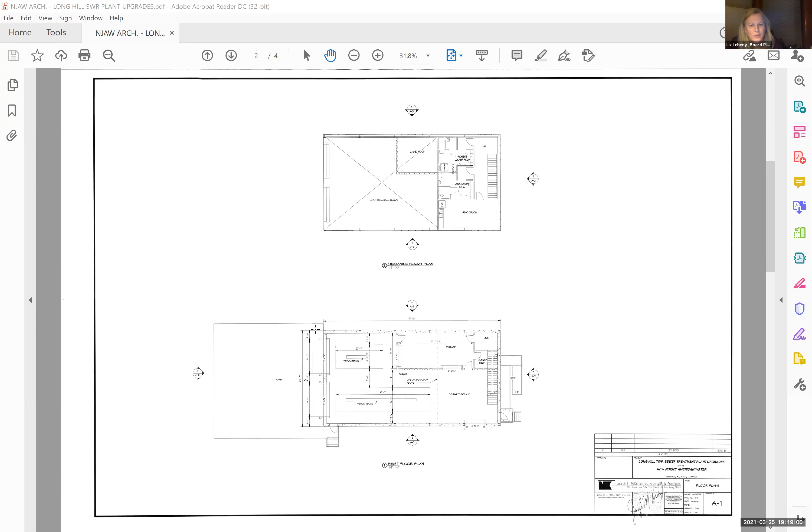Okay, can you just go to the elevations? I just want to, if you can explain it, looking at the elevation. So, okay, that's a good one, on the top one. So it's coming out there, and that's really sort of more on the south side of the building? That is correct, it's visible not on both - south side, I'm sorry, I didn't mean that, I meant the north side. Okay, okay, all right, thank you.

I am confused by the ground level of those big doors. There is a 5-foot flat spot right in front of the doors, and the rest is a ramp that will get us to the existing grade. Okay, thank you. That's probably shown on the site plan. We'll get to that.

Anything else, Liz? No, that's it, thank you. Any member of the board with questions?

You talked about the existing building. Are you talking about the building that includes the foreman's office, the generator, and the lab? Yes, sir. And you're telling me that building is now emptied in favor of the trailer? No, there are still some people in there. The lab is in there, and there's not a full-time employee in that lab, but it is occasionally manned to provide tests for the facility.

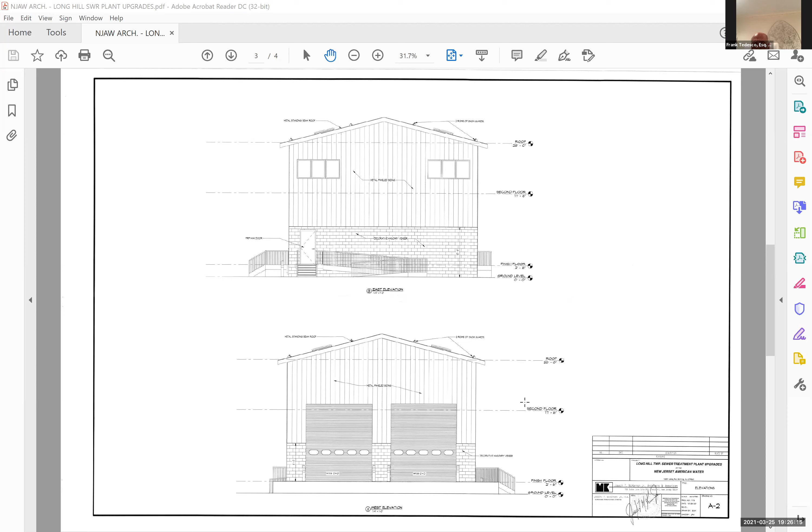Okay, Mr. Stires, please raise your right hand. Do you swear that the testimony you're about to give with regard to this application will be the truth, so help you God? I do. Thank you. Please state your name for the record and spell your last name. Craig Stires, S-T-I-R-E-S. Thank you.

And you are testifying in what capacity? I'm a professional engineer in the state of New Jersey, and I oversaw the preparation of the site plan for the location of the new garage.

Have you ever testified in Long Hill? Yes, I have. Oh, good. I have testified before this board twice for a couple minor subdivisions, one a couple years ago and one about 6 or 7 years ago. And your firm is located? Stires Associates, and we are at 43 West High Street in Somerville. Thank you.

Any member of the board want to hear any more about his qualifications? All right. You're on.

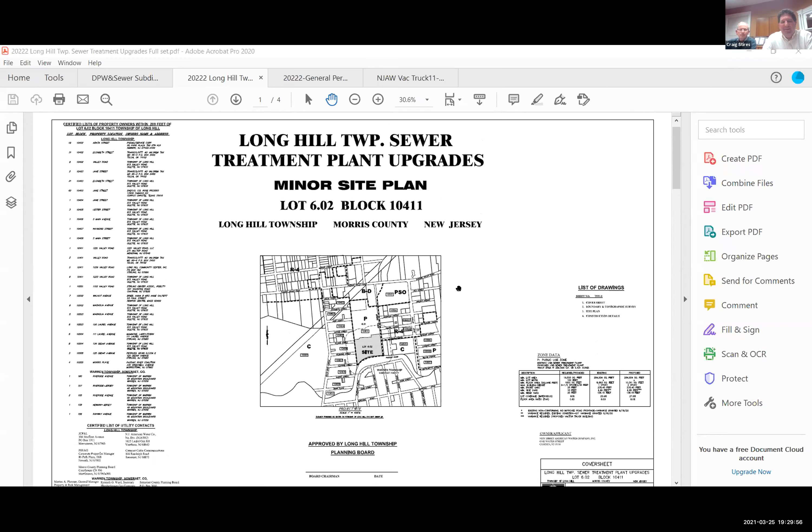All right, hopefully what you see here is the cover sheet of our plans. I'll scroll down. So this is the existing conditions. Now I'll get started, now that we've got it cleared up.

The existing site is known as block 10411, lot 6.02. While the address is technically 1227 Valley Road, it's actually located at the southern end of Warren Avenue. Warren Avenue intersects Valley Road right at Jaeger Lumber, and Warren Avenue goes down to what was formerly the plant itself, as well as the Long Hill Municipal Yard.

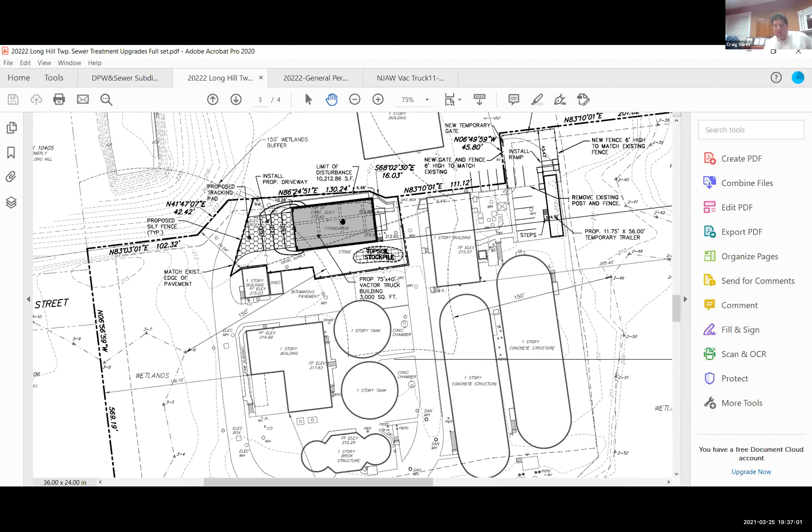The entire site is in the flood hazard area, so if we were to move this building to an open area, we would have to create some other compensation for the displacement of the flood hazard area. So with the existing foundation, utilizing the existing foundation, we're permitted to increase the size by 750 square feet under the general permit. That's the reason for the location of the building, essentially trying to use the existing foundation which was currently in that location. So technically speaking, that 4.48 feet off the sideline is to the existing foundation.

Understood, thank you. Now, the permit, you mentioned the 750, that's a permit by certification, and you've already received that? Yes. Okay, great, go ahead. Tell me about your permit by certification. If the application's approved, we will submit that as part of the documents, and if there's any changes to the plans, just so you have it on record.

Very good, thank you. A couple of questions about the utilities that I raised with the architect. Let's start with the diesel supply line that's indicated as existing between the two buildings. It traverses right under the proposed building. Is that diesel supply line located accurately, and if it is, how do you plan on working around that?

What we've done is utilize some older plans to begin to show the utilities. Subsequent to the plans being prepared and submitted to the township for this meeting, American Water has had the geotech go out, not only for bearing capacity for the building, but at the same time to investigate the specific locations of the utilities in and around the proposed footing or foundations. So we do have much better locations, which we will update the plans to show if the application is approved. It's my understanding that diesel line is no longer active, so again we worked our way from older plans as well as our field survey to get these as accurately as we could.

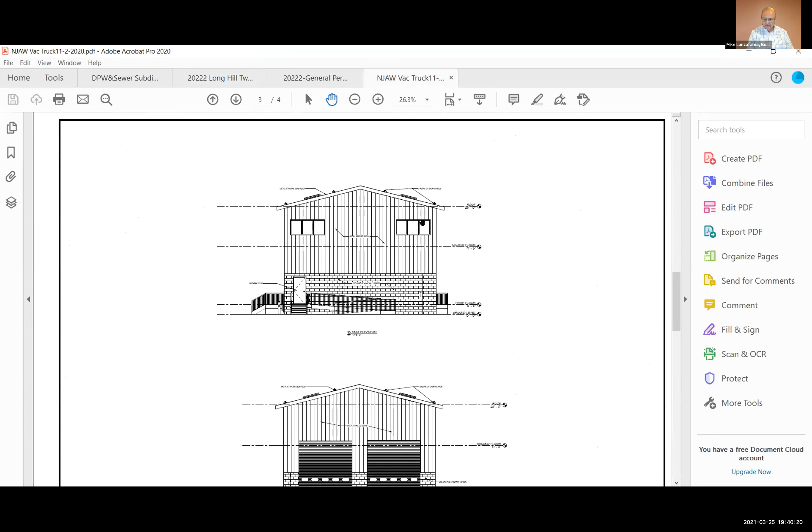Perfect, thank you. You also show a bollard detail. I was just curious as to where you're proposing some bollards to be placed. Let me see if I can switch to the architectural plan. There's a bollard on either side of the garage doors. I got you, so we will add those to our plans to coordinate between the two plans.

Now, you show a handicap ramp into the building, and also a handicap ramp up into the temporary trailer, but I don't see any handicap dedicated spaces anywhere. We can update the plan again, we'll probably show it in the location of the parking lot, and then once the trailer is out of there, they would paint the appropriate striping. Because right now those parking spaces would not be accessible with the temporary trailer there. That's correct. So this is, and you're anticipating the trailer is going to be there for about 18 months? Yes, I believe that's what Joe said.

Okay, all right. Is there any lighting proposed around the building? Will there be security lighting, I assume? And so where is that to be?

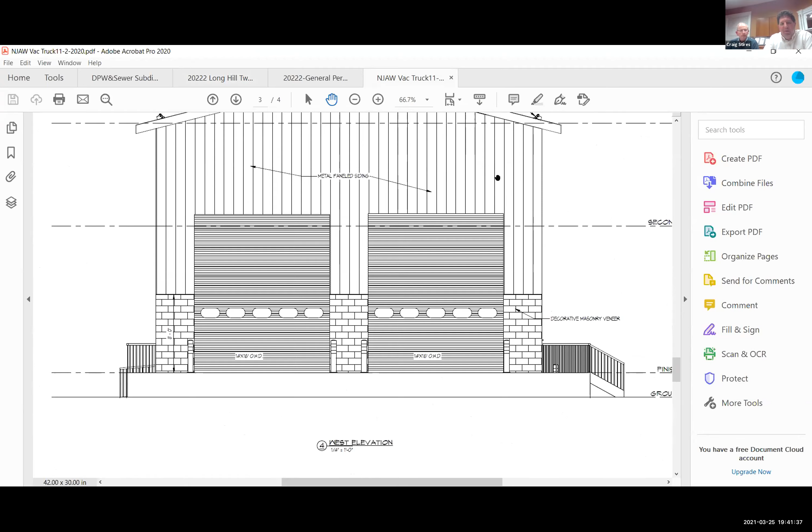I don't believe so, but as a condition of any approval, I would think you may want to show us some locations of lights, whether that's a code requirement. I got to believe that the handicap ramp and the staircase require illumination, so whatever's required by code, I would ask that the architect add that to his plans as well.

Okay, not a problem. All right, I think that's all I have, Mr. Chairman. Thank you. Liz? Thank you, Mr. Chairman. Could you just go through how the trucks would circulate into the site and get to the building?

The intention would be that they would come through the Public Works yard and come into the driveway in this location, and then obviously pass it and back into the building itself. Then most likely circulate around the driveway and back out.

Okay, and then there was another question I had for the architect about the floor area and how it was calculated for in the application. He sort of deferred to you. Do you have that information? Yeah, basically, like you said, we took the garage area out of the remaining building, and that's how we came up with the floor area ratio.

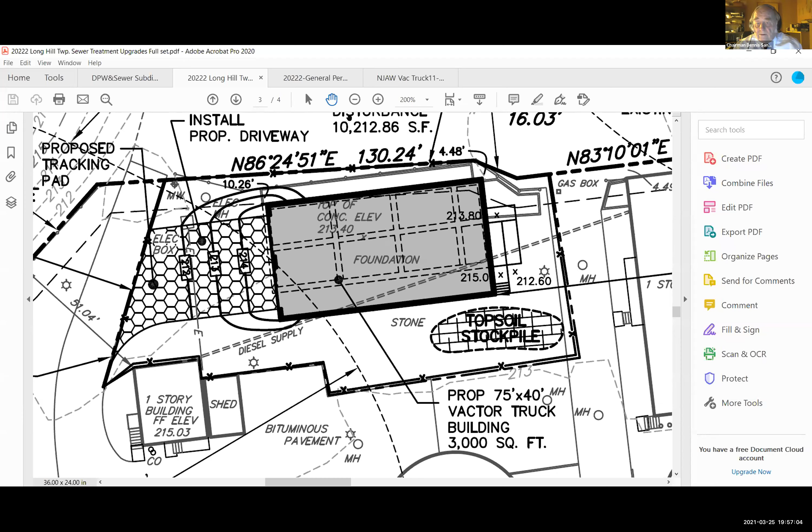You're welcome. So based on a .07 difference in elevation, that's about an inch. Yep, this building's floor is about the same height as the existing building's floor. Correct. Does any member of the board who's been around town long enough know whether the existing building has ever flooded out? I know there's been water in the driveway, but I don't believe the building has ever taken water.

Mr. Chairman, the applicant's engineer indicated they've established the flood hazard design elevation at 213.5. I assume, Mr. Stires, that was taken from the FEMA mapping, and you added a foot to that as required by the DEP, and that's how you determined the flood hazard design elevation. So there's a buffer built in, the addition of 1 foot, plus the permit by certification requires the building be set 1 foot above that elevation. So you're talking about 2 feet of freeboard or buffer put into the overall approval process.

And Mr. Stires raised it up another 6 inches besides. So to respond to the neighbor's comments, I don't think it's necessary to elevate it another 36 inches total. I think the DEP's regulations are to keep the fill to a minimum, and by doing what is proposed on this plan, we are doing that. The DEP's permit by certification has already been issued. So I don't see any real concerns from a stormwater management or flood hazard issue with regard to this.

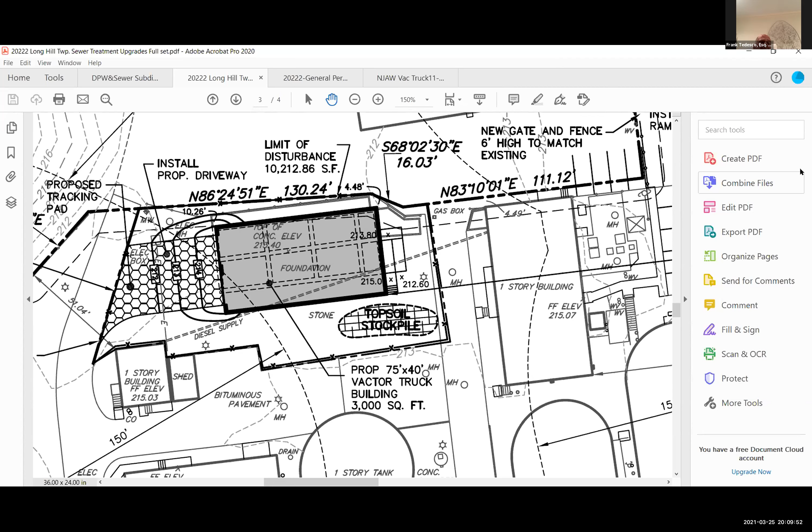Okay, there are no other questions. What's next? I think we've got the issue with respect to a change. We need a variance, I believe it's 4.5 feet. We have Mr. Kaiser, who is a professional planner, and he's going to give testimony as to whether or not the proposed height is correct.

Jolanta? Yes, I just want to clarify that that's a bulk variance for a side yard setback, right? Because I thought I heard use. I just wanted to correct the record.

Mr. Kaiser, can you please raise your right hand? Do you swear that the testimony you're about to give with regard to this application will be the truth, so help you God? Yes, I do. Thank you. Please state your name for the record and spell your last name. My name is Robert, last name Kaiser, K-A-I-S-E-R. I'm a licensed professional engineer and also a licensed professional planner in the state of New Jersey.

I've been a licensed professional planner since 1983, and I've testified as a planner before numerous boards here in the state. Mr. Kaiser, it's Frank Tedesco. Would you please explain to the board, I'm sure they've heard it before, but we'll need to put it on the record, what your conclusion is as to the height of variance that they are.

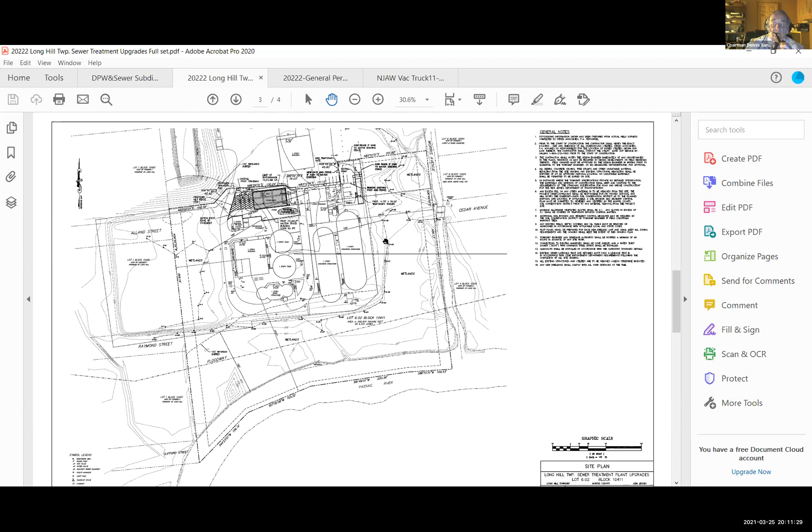Could we hold that question just for a minute to talk about qualification? Any member of the board have any objection to qualifying Mr. Kaiser as an expert witness? No objection. No objections. Okay, I'm sorry, go ahead Mr. Tedesco, repeat your question. I'm sorry, I should not have done it, but I thank you for your patience.

Go ahead, Mr. Kaiser. Why don't you set forth for the board why, under your theory, the board should give a variance for this particular project.

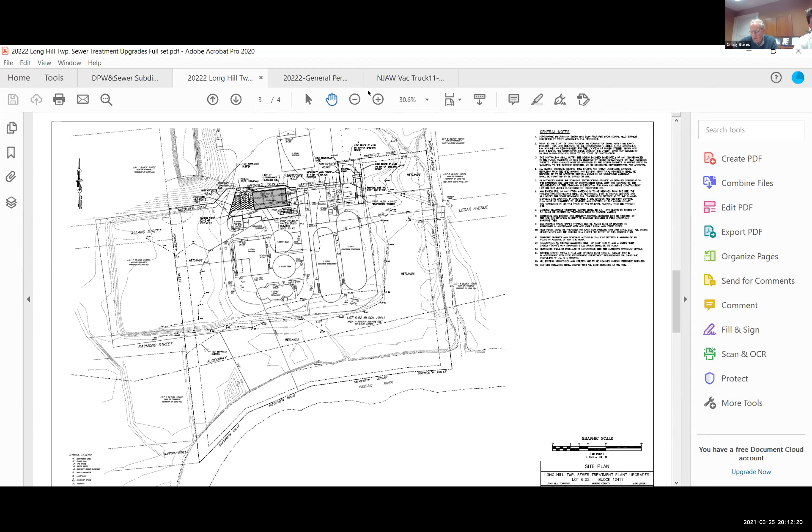Let me just clarify the variance that is being requested. What's being requested is a side yard variance between the proposed garage structure and the northern property line. Currently, the distance between the property line and that existing settling basin is 4.49 feet. What's proposed is the building will be 1/100th of a foot closer, instead of 4.49 feet it'll be 4.48 feet.

The 4.49 is a pre-existing condition, although the township's requirements are a 10-foot setback in this particular area. Also, I'd like to note that the distance between the existing building and the property line is 4.5 feet, as was reported on the previous subdivision that was provided for this property.

Regarding why we qualify for this variance, the MLUL provides for a number of purposes. One is to encourage the appropriate use and development of all lands in the state in a manner which will promote public health, safety, morals, and general welfare. In this particular case, by constructing this building at the location provided, public health, safety, and general welfare will be provided to the township. Also, another purpose of the MLUL is to promote establishment of appropriate population densities and concentrations, which will contribute to the well-being of persons, neighborhoods, communities, and regions, and the preservation of the environment.

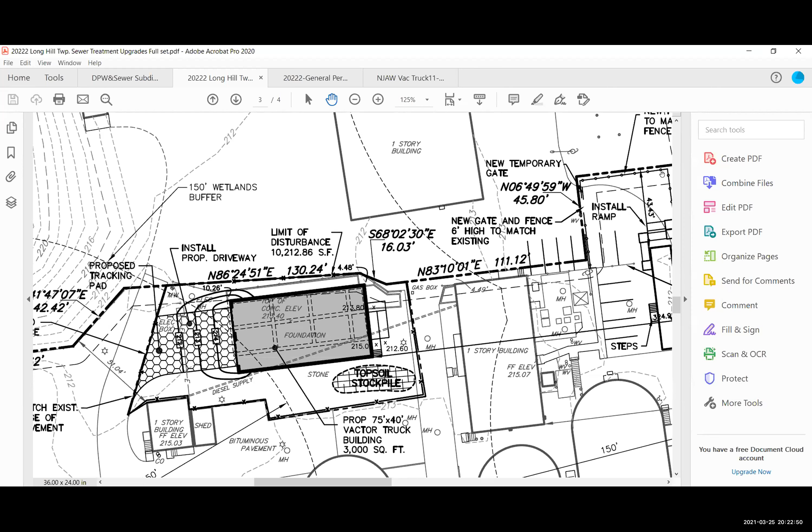Until these four issues are addressed, I would recommend that you as a planning board defer until all this information comes forward, and then you effectively evaluate whether or not you should grant approval to this applicant. Thank you very much for your time.

Thank you, Mr. Arendowitz. Any other comments from the public? All right, then. At this point, I will ask for a summation by Mr. Tedesco.

Yes, on behalf of New Jersey American Water, obviously the situation in Long Hill provides an excellent opportunity for both Long Hill and surrounding areas to have a more efficient way to handle the water and sewer problems located in the area. The individuals and the company have taken a tremendous amount of time and effort to get this thing moving along in a reasonable manner. We appreciate all the time that has been offered to us by the township, and we believe that at this point, this project is for the better good of numerous people, and will help certainly Long Hill and whatever surrounding areas will eventually be tied together by New Jersey American Water.

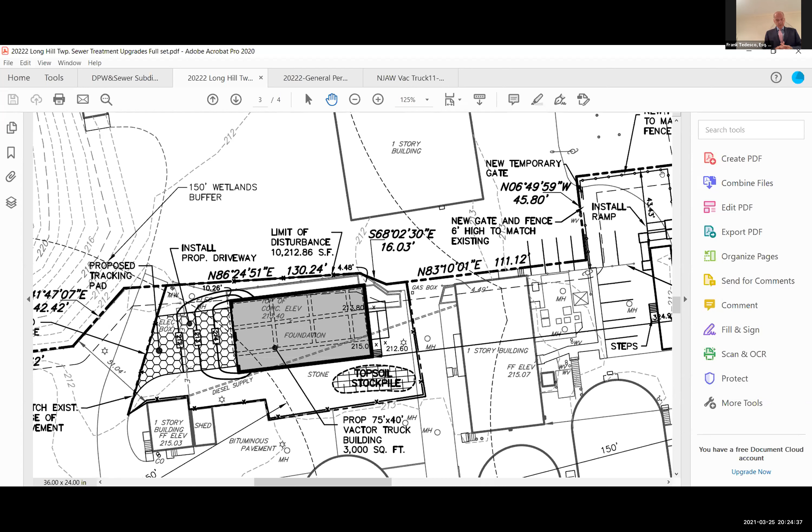So we would respectfully request that the board seriously consider granting the approvals that we have requested as set forth by the various speakers who are working on the project for the last probably two years now. Thank you.

At this point, I'm going to open the discussion to the board members as to the items that you think should be included in the approval or disapproval. And I will start with the first person to raise their hand.

Mr. File, you were first. I suggest that our board attorney list the conditions. I'm sure that she has written those down, so if we could review those first, that might be a better place to start. I can do that, Chairman, if you'd like me to.

Sure. If the board approves this application, the conditions the board might consider are requiring the applicant to update the site plan and resubmit the corrected site plan to indicate the accurate location of the existing utilities and how those utilities are going to be servicing the new building.

The applicant should also update the site plan to show the bollards shown on the architectural plans. The site plan should also be revised to show the handicap spaces, their location, and their striping.

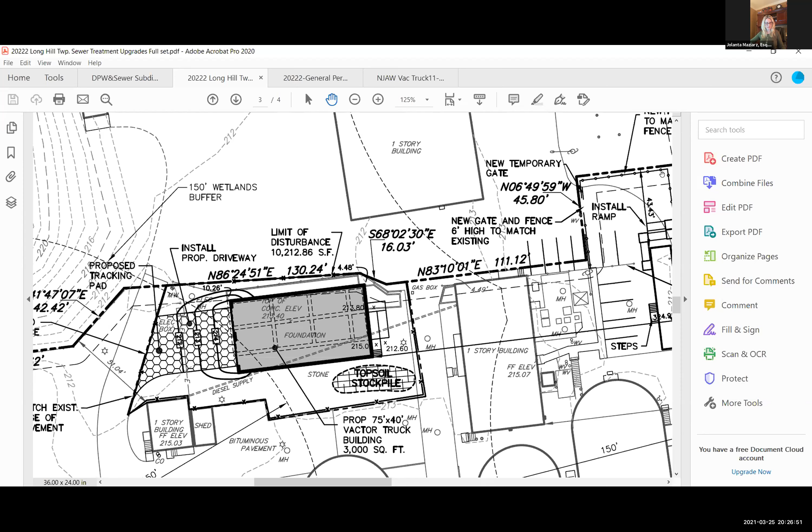The applicant will also be required, as in all applications and all approvals, to comply with any third-party agencies having jurisdiction over this application. We heard extensive testimony with regard to floodplains and the New Jersey Department of Environmental Protection. The applicant will have to obtain those permits, comply with those agencies' decisions, and also provide all of those permits and approvals to the township as they become available.

I think the last condition is that the applicant will be required to remove the temporary trailer within 30 days after construction is complete on the proposed building, in accordance with the township's ordinances.

Would you also add to that how we drain the truck when it comes in after pumping out sewer manholes? I think that's covering utilities, isn't it? Well, it might be. The applicant testified that there would be a way to separate the oil from the water. Is that what you're referencing? No, I'm talking about when they pump out a sewer manhole and the truck comes in looking like a septic tank drainage truck. They've got to put that somewhere. He mentioned a couple of manholes, but I'd like to see what the exact drainage system is.